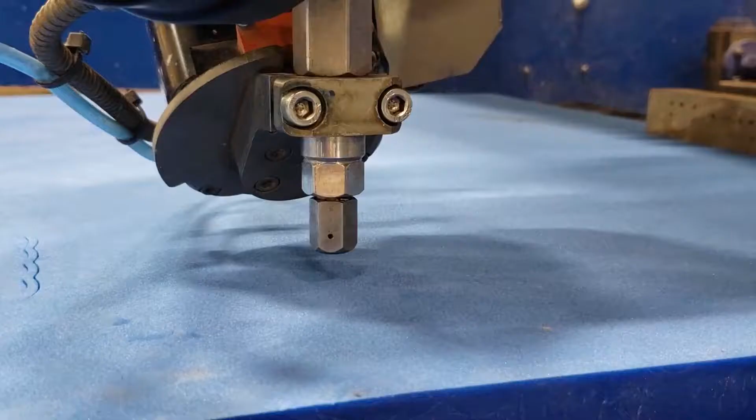What you can see here is we've got some of the Zotefoams blue azote material, and we're cutting this on our in-house Apex 60 mechanism. This is a mechanism that can be outfitted on any of our water-only systems to really increase the production capabilities of your WaterJet.

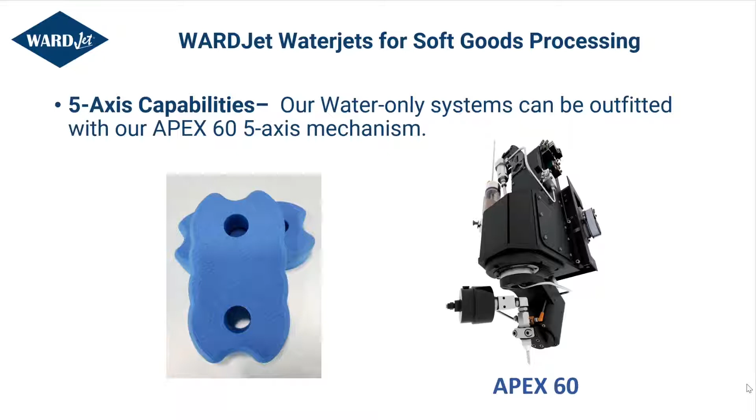As you can see, it's able to cut both 2D shapes and then quickly transition to cut that 45-degree bevel on the outside of that piece, and then back to 2D to cut the final profile. The finished piece is something that would be very hard to manufacture just as quickly if you weren't using the WaterJet.

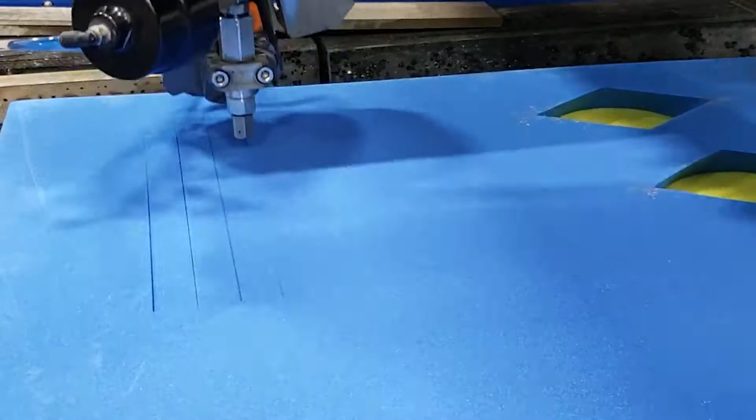The other piece I want to talk about is material stacking and common line cutting. We touched on these last week, but on the same mechanism running there, you'll see the Apex 60 running only in 2D mode here, trying to process multiple cubes, taking its passes back and forth and then transitioning again.

What this is doing is we've got two materials stacked, both the blue and the yellow, and we're also using common line cutting. Instead of taking 4 passes for each one of those for that cube, we're just taking 2 swipes at it and then using common line cutting.

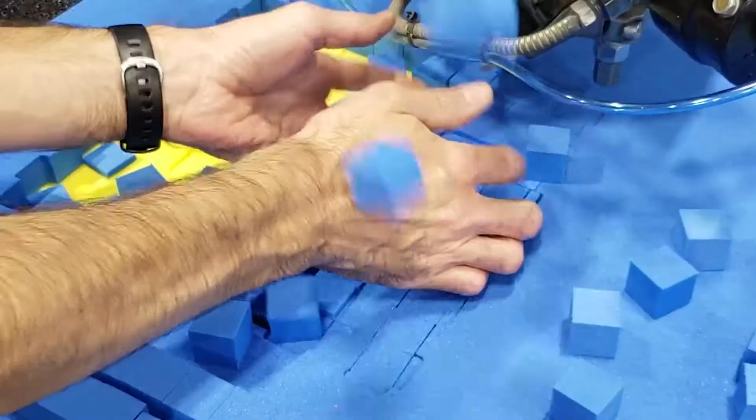As you can see, as Jeff starts to unload some of those pieces, you end up with a lot of production very quickly, compared to if we were to try to do this on a single sheet and cut out each one of those cubes individually. Clearly this is a simple shape, but the basic principles translate over into whatever piece it is you may be cutting.

The last issue I want to talk about this week is some of the different workflows that you can get for water-only cutting, and clearly WARDJet offers a variety and is able to cover any need. I wanted to start off first with our J series and L series, which is really a pass-through workflow, which we saw last week in the machine that we walked through.

You'll see that we start with raw material on one end of the machine. It gets passed through, processed in the middle, and then out come your finished parts. What you get with this is very, very high throughput because you're able to load material, process material, and unload material all at the same time.

Typically you'd find this in a facility where you've got multiple people running this machine, one person responsible for loading the material and starting the program, while another is dedicated to just unloading the material. With systems like this, it's not uncommon to see one warehouse space with raw material on one side, 2 or 3 employees running just a single machine, and then finished parts getting packaged and sent out to customers.

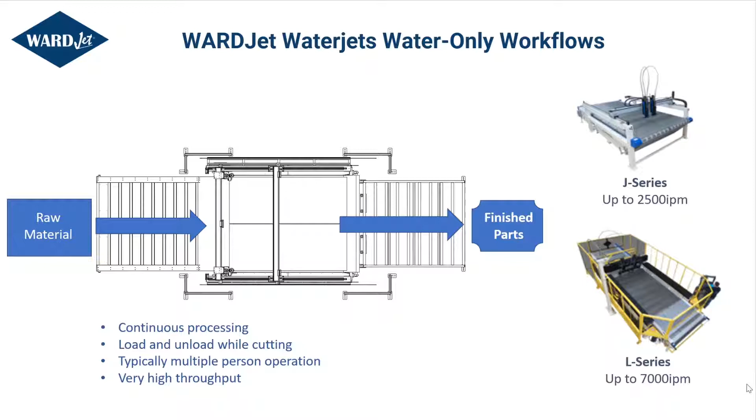One of the more typical workflows you'll see is just your standard WaterJet workflow. With this one, you've got a single plank of raw material that gets loaded onto the machine, it gets processed, and then it gets unloaded. Now clearly this is not going to be the high throughput that you get on some of the other systems, but this does have its place in many facilities.

Those facilities may have limited space, so this is going to offer the smallest footprint in your shop. This can also be very easily run by a single person, most often someone who's programming the parts, loading the parts, running the machine, and then unloading those as well.

There are ways to increase throughput on this. Multiple heads can clearly increase the volume that you can output with this workflow, but most often you'll see in machine setups like this, you may have 2, 3, 4, up to 10 machines in a facility, all dedicated to either one application or one material, all being dedicated to one operator, or potentially there's one operator that's running 2 machines at the same time.

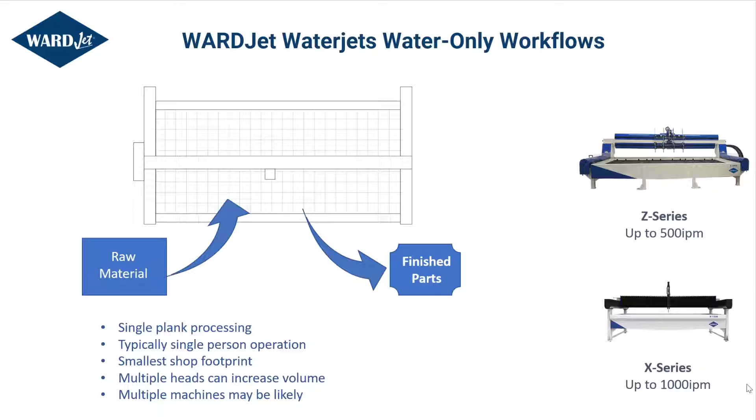And you'll see this kind of workflow in our Z series and in our X series machines.

The final workflow I want to talk to you about is one we're going to be looking at today with Jeff and Johnny on our floor. Now this is one of our X series machines that takes that typical footprint, but also adds a shuttle table to this. So the one we're going to see today is an over-under shuttle table. We also do have pass-through shuttle tables as well, which kind of give you a little mix between the J and an X on there.

So this is really semi-continuous processing, where you're still taking a piece of raw material and putting it up on the bed, loading it in, and you're operating one at a time. But the benefit of this is you're still able to load and unload one sheet while the other is processing. So typically while one is processing, you're taking the spent parts and the skeleton from the previous operation, loading a new sheet on, and then as that first process ends, you're swapping those tables in and out.

Again, you get the benefit of the smaller footprint in here, not quite as small as a typical one, but not quite as expansive as you'll need for a J series or an L series. The same tenets apply - multiple heads are going to increase your volume in there. So there really is kind of a mix when you talk about this.

So, looking over the different workflows that we have, it's very evident that WARDJet has dedicated a lot of time, energy, and engineering into covering whatever your application may be. So please feel free, contact us, talk to your sales rep. We're very happy to take your material and your application into consideration, as well as your warehouse and your business needs, to provide you with the best waterjet system on the market.

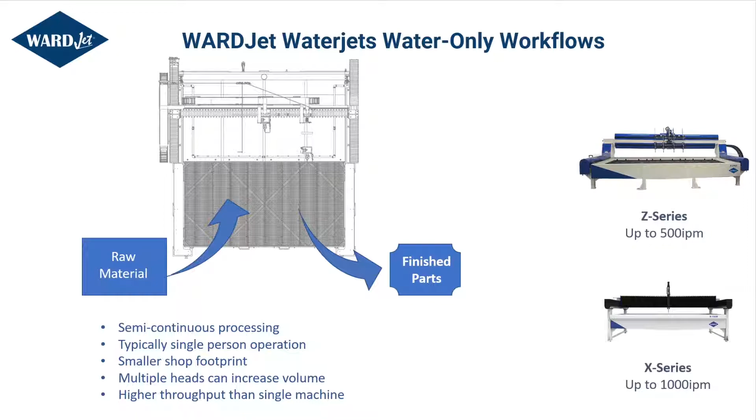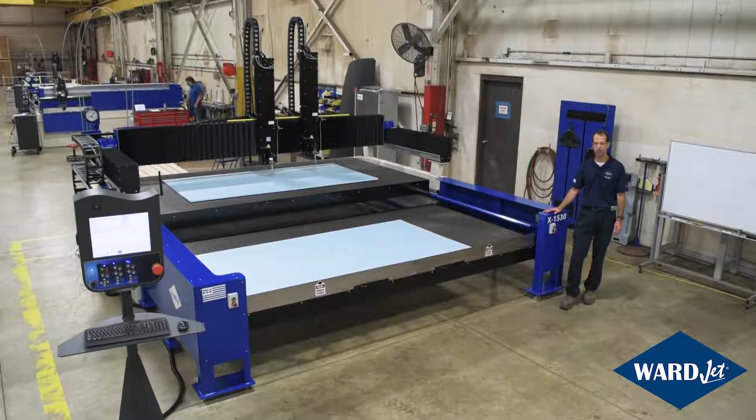Whether a company opts for a system like our Z series with the conveyor and the long loading and unloading areas, or a series like this with the shuttle tables, depends on a few different factors. First of all, how the material's flowing through their facility. So if you've got an aisle here and this is up against a wall, you can have area here where you've got your raw material, your cut material, and this is very conducive to having one person run this machine, load and unload your material.

Z series, where they're a little bit longer, that's often you'll have multiple people running it, one person at one end putting maybe material on, other person at the other end of the table taking the material off.

One of the important factors when looking at a waterjet system is your choice of substrate that you're going to be cutting on top of. So depending on the density of your material, the application, size orifice, pressure, things like that, will determine whether you use something like this Johnson screen or a material like a water brick.

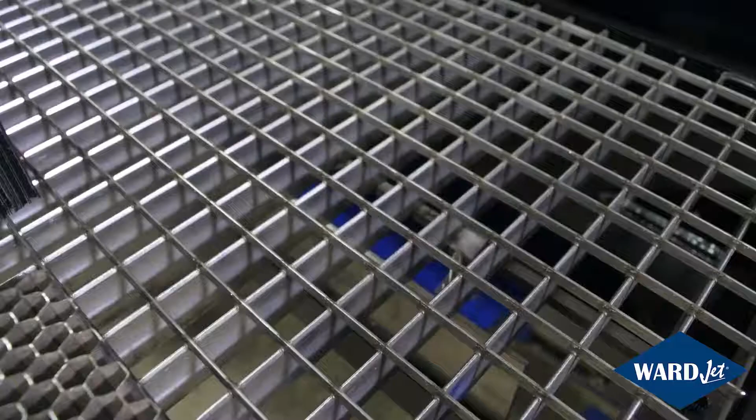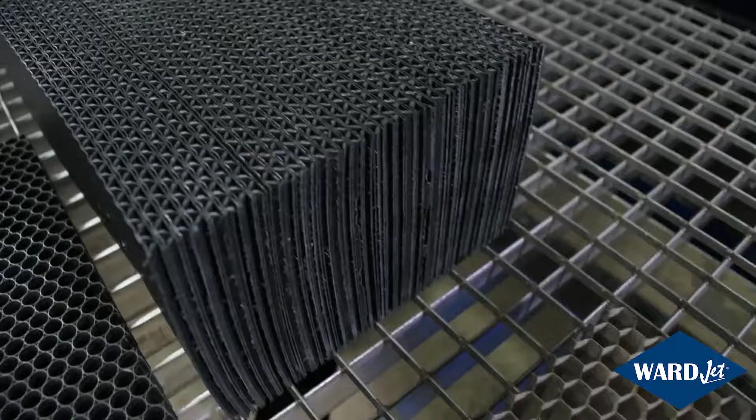So if your part's going into a crate and the back surface isn't going to be visible, you might choose something like the Johnson screen, or maybe a honeycomb, which can come in different opening sizes and widths of the webs there. If the part's going to be more visible and you don't want to see any sort of dings on the back of it, then you might choose something like this water brick here. And depending on the color of the material you're cutting, the water brick can be either white or black.

So it's one of those important factors where we can do some test cuts on these different materials, and then you can choose which one's optimum for your situation.

So here we have the Z carriages on this machine. This customer has opted for 2 cutting heads. Depending on the size of the parts you're cutting, you might decide for 3, 4, 5, or 6 cutting heads. You can also get spreader bars with multiple cutting heads on there.

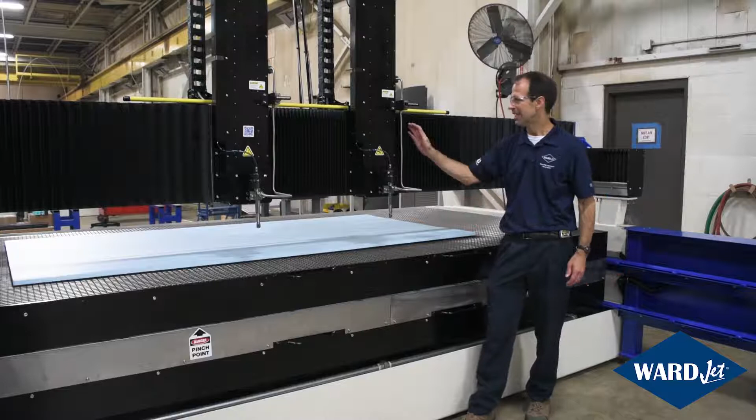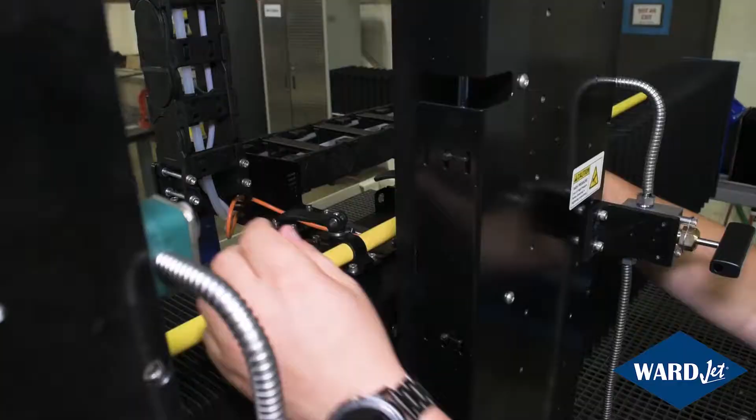For the head spacing on this machine, this is manual head spacing, so there's a couple cam levers back here. The operator can very easily loosen those levers and position the cutting head to the desired distance, then lock those back down. You can also opt for programmable head spacing.

Depending on the size of the parts in the program, the CNC file can automatically change that head spacing, and can even change that head spacing throughout the program.

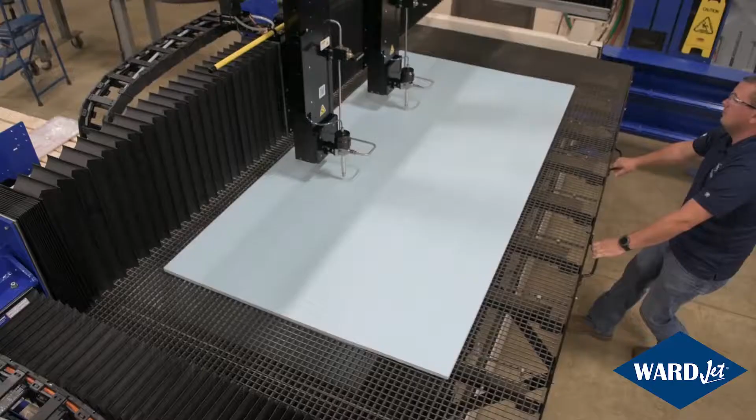This machine's got programmable Z. As you can note, we have 24 inches of Z-axis travel here. That allows us to get down to that lower table. So automatically when we switch tables, we're going to switch our limits, and then the cutting heads are going to go down to the appropriate height off of the material on the lower table.

A couple other features to note here. We've got hand valves, so operators doing any maintenance on the cutting head can close the hand valve to isolate pressure to the cutting heads.

One other thing to note here, on this Z carriage, we have this QR code. We put these around our machines at various strategic locations, and this will link to things like videos and manuals, any sort of documentation that might help with maintenance on that particular aspect of the machine.

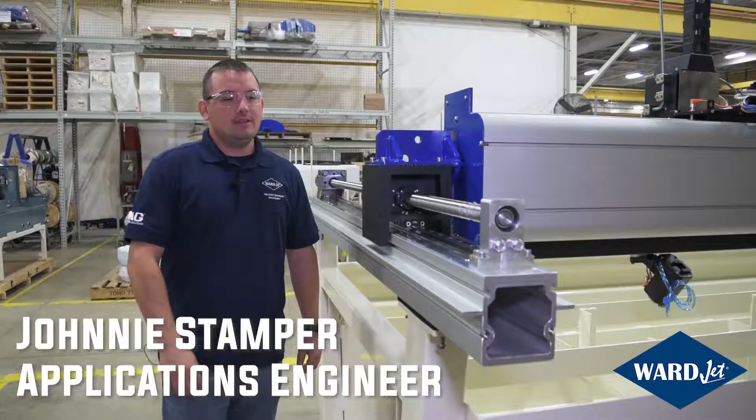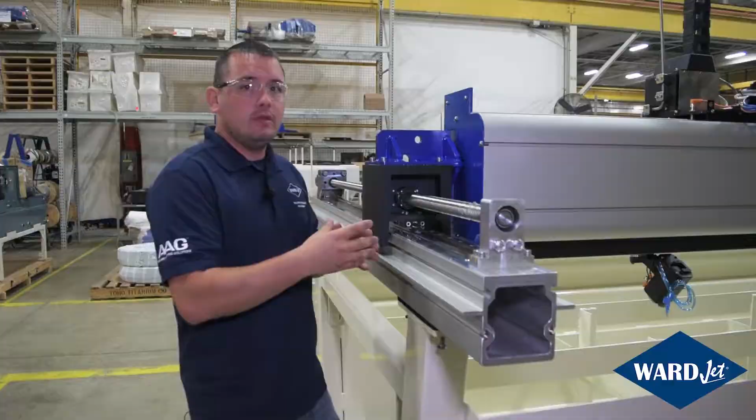Our X Series line of machines have custom aluminum extruded side rails and cross beams, and we pair those with a THK ball screw and linear rail. The ball screw has 2 raceways on it, and we use one of them. So in 10 years, if you see tolerances start to expand or get a little bit of play, you can switch that to the next race, and it gives you almost a brand new machine.

With the THK ball screws, linear rails, and the aluminum extruded side rails and cross beam, we pair that with a large motor and gearbox combination, and that gives us the ability to hit speeds up to 1,000 inches a minute and acceleration rates up to 15 inches per second squared.

Okay, we'll go ahead and run through the basic workflow on this machine. We've already got material loaded on the top table, so Johnnie can press the release button and push this table in. Obviously this machine is a manual system, but these tables can also be powered, so that once these tables are locked into position, he can then run the program.

Controller has a couple things going on here. We've got head leveling, so head 2 is always going to come down to the same height as head 1, and then we're working off of a work offset position, which establishes our height off of the material. Depending on whether we're using the top or bottom table, we can have different Z heights there.

So once the program finishes, then again we'll be able to release the tables, swap them out, and continue on with the process. So that program's done, we release.

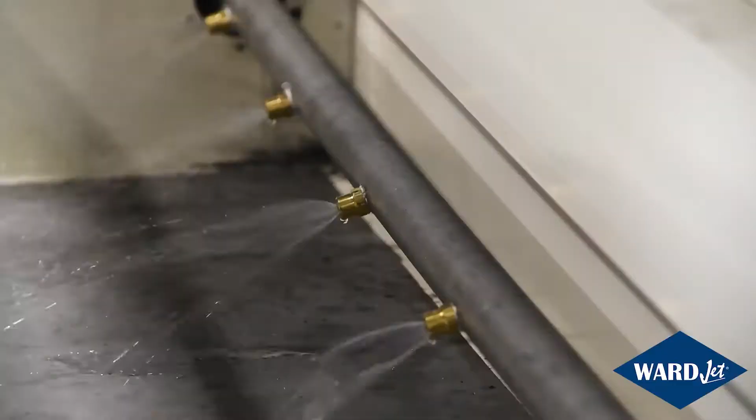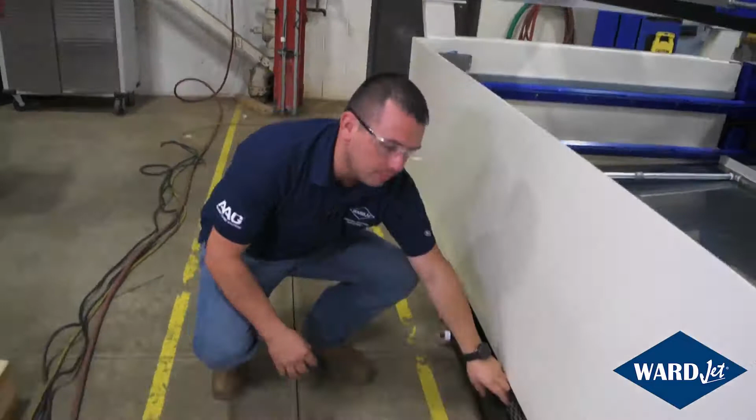It has a built-in washdown system that pushes that kerf material to the back of the tank and down that drain point. As the water exits the tank, it goes into a sump pump tray. The sump pump tray has a stainless steel grate to catch any large media.

As the water comes through, it fills the tank. The tank then has an electronic sensor here that activates a timer, that activates a pump to pump the water down and out of the tank. That water can go to a paper bed filter, to a drain, or anything the customer is looking to do with it.

Hello, my name is Terry Craig, and I've been asked to speak with you about a family of materials that is produced by a unique process. Zotefoams offers a range of high-performance, lightweight, cross-linked polyolefin block foams known as Azote that are among the purest, most consistent, and technically advanced cellular materials on the market.

But first, a bit about my credentials. I've been in the foam fabrication industry for over 35 years with direct experience in automotive, aerospace, mass transit, medical, defense, electronics, and of course, product protection. My career has spanned operational and executive roles in quality assurance, manufacturing, product engineering, design, and business development.

I've worked with Zotefoams materials since the early 90s, and today I want to share some of the advantages of their products from a fabricator's perspective and how these advantages can help you to grow your business. It all starts with an understanding of Zotefoam's unique process.

Most cross-linked polyethylene and copolymer block foams rely on chemical blowing agents to create a cellular matrix, and those blowing agents can introduce volatile organic compounds, which become latent and residual in the foam material. Zotefoam's Azote materials do not use chemical blowing agents. Instead, they use high purity nitrogen, which is among the most common elements in the universe and is generally considered inert. In fact, it makes up approximately 78% of the air we breathe.

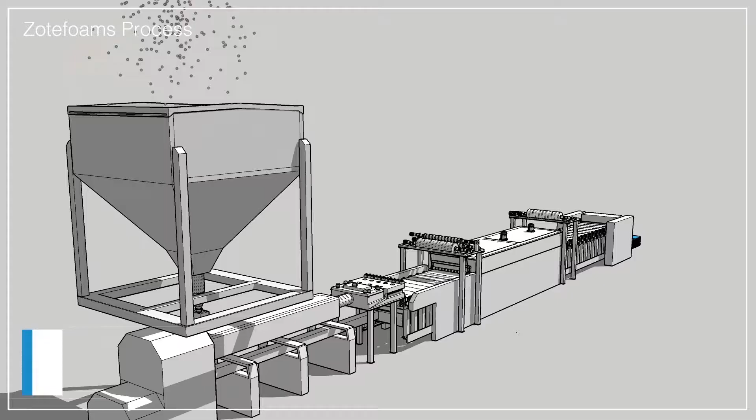So how does Zotefoams produce foam from nitrogen? Well, it involves a unique three-stage process. Stage 1 is extrusion and cross-linking, where polymer and additives such as colorants, fire retardants, or conductive agents are extruded into a solid, continuous plate, which is cross-linked, cooled, then cut into slabs.

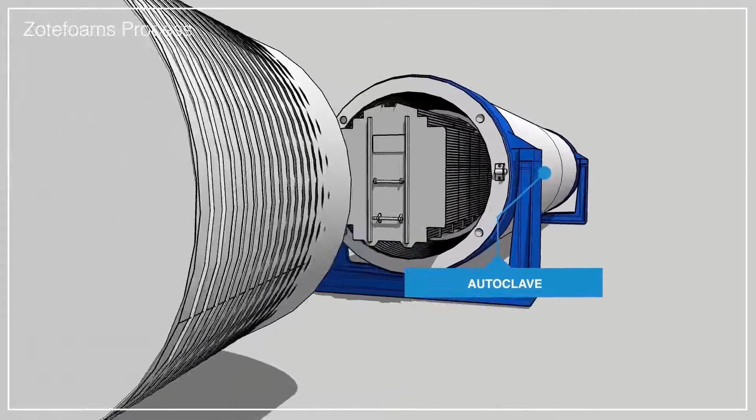Stage 2 is nitrogen saturation, and this is where the science begins. Slabs are heated above melting point and infused with high-pressure nitrogen gas. Rapid depressurization at a controlled rate causes nucleation of the cellular structure within the slab, and subsequent cooling while under pressure locks in the nitrogen.

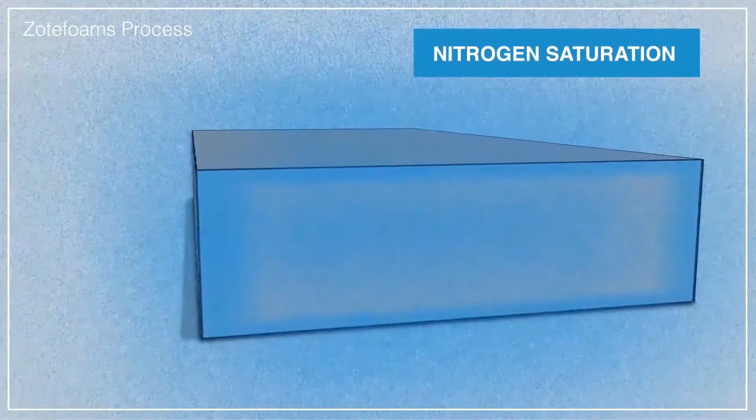Temperatures in the autoclave reach above 250°C or 480°F, and pressure can exceed 670 bar or 10,000 psi. To put that in perspective, that's the pressure of water more than 4 miles beneath the surface of the ocean.

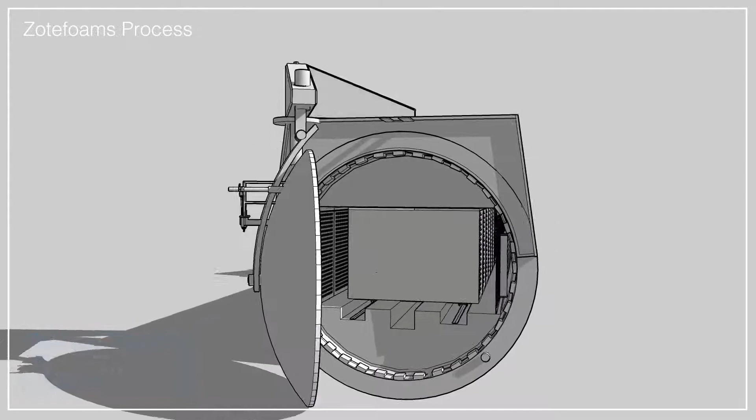Stage 3 is expansion. By heating the slabs under moderate pressure and then reducing the pressure, the locked-in nitrogen is allowed to expand. Important to note is in this process, expansion is unconstrained and uniform in each direction. There's no physical mold or platen that can cause densification along sidewalls or from top to bottom within the block. This is a very important distinction which contributes to several performance characteristics which I will describe in detail.

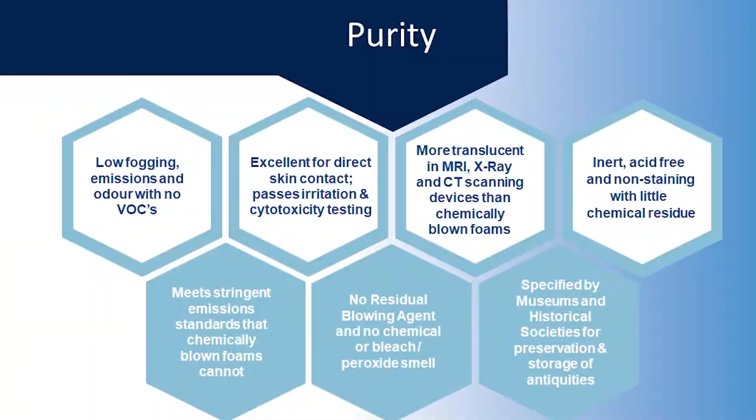How does this unique process benefit the use of the material, and specifically its fabrication? First, from its purity: low outgassing, low VOCs, no residual blowing agent, and low fogging means you have the ability to provide protection of devices and instrumentation that contains sensitive optics, lenses, and electronic circuits without concern for fogging or staining. Coupled with very little odor makes these materials perfect for sealed bag and case products such as supplied in medical kitting, product protection, and case inserts.

It also enables you to meet stringent interior emissions requirements for human occupancy applications such as in automotive, aviation, and mass transit. It is also excellent for direct skin contact in medical and sports products, meeting international standards for skin irritation, sensitivity, and cytotoxicity, and its closed cell structure prevents moisture and fluid ingress while suppressing bacterial growth.

Purity also produces foams with the whitest whites, the deepest blacks, and vibrant colors, all providing unparalleled choice to suit the end-use product.

Consistency. The Zotefoams process enables control of the cell size. Combined with unconstrained expansion, the cell structure is considered isotropic, meaning predictable performance no matter what direction a stress or strain force is applied from.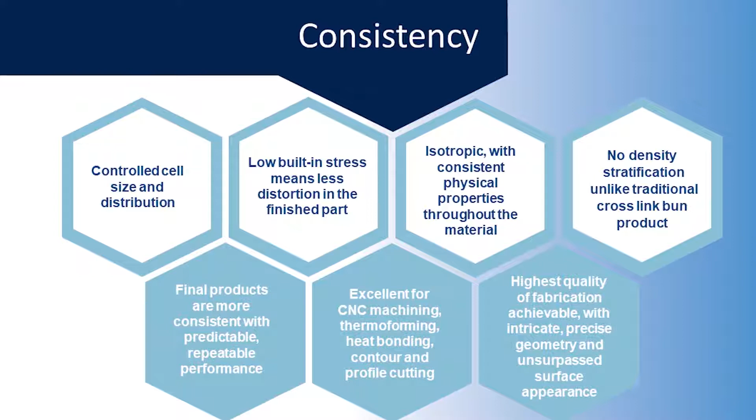There's no machine direction cellular orientation, no elongated cell structure, and no density stratification through the block. From top to bottom, across the full width and length, the material will process and behave the same. For applications involving comfort or protection, this means product performance will be uniform, consistent, and predictable no matter the orientation that the material is used in.

Unconstrained expansion also means low built-in stress, which reduces the potential for distortion during processing and in the final product. Have you ever split a bun into sheets and then discovered that the overall dimensions change or the squareness of the sheet becomes distorted? Zotefoams materials are dimensionally stable as received.

Important to throughput, it does not need to be split into sheets, then stored anywhere from 24 to 72 hours or more to allow the material to relax and normalize. And unlike chemically blown materials, Zotefoams products do not need to be pre-split to allow outgas of any residual blowing agent.

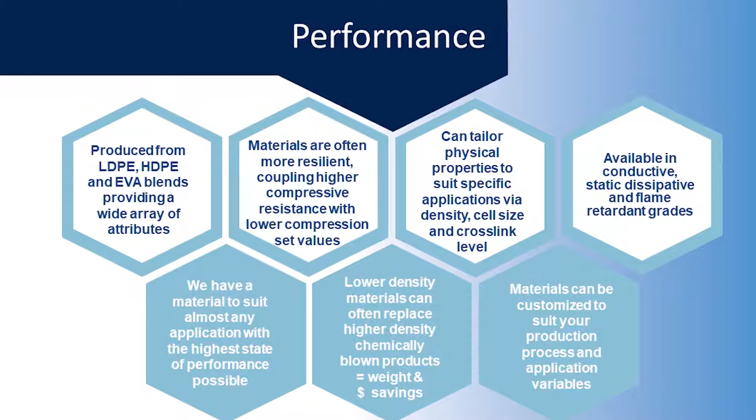Now let's talk about performance in processing. Uniformity and controlled cell size produces consistent, finished product with clean, smooth edges and with surfaces that are more resistant to marring and scuffing than most chemically blown materials. This is often important in case inserts, display packaging, medical, and sports components.

You can achieve high quality, intricate, and precise geometry with unsurpassed surface appearance, be it through CNC machining, waterjet cutting, die cutting, hot wire or abrasive wire profiling, or virtually any manner of fabrication technique.

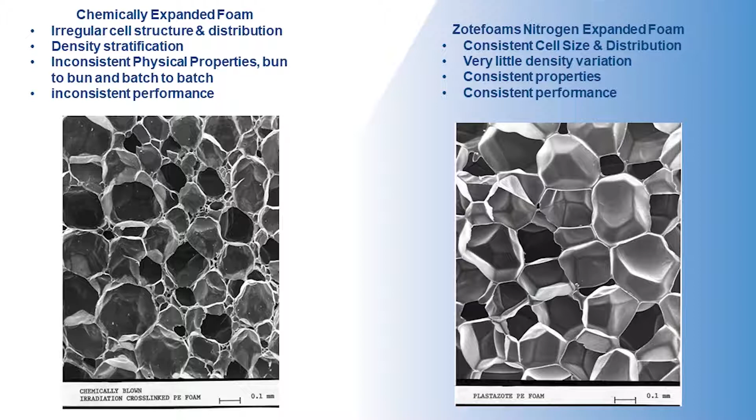Zotefoams materials are also easily thermoformed, heat laminated and bonded, with throughput speeds and yield factors that are among the best in the industry. Often, lower density materials can outperform higher density competitive product while providing savings in weight and in overall component cost.

We've talked about the material, now let's talk about Zotefoams, the company. They offer the widest range of block materials on the market, including low density and high density cross-linked polyethylenes, VAs and EVAs, along with fire retardant, conductive, static dissipative versions, and specialty polymers including nylon, PVDF, and TPE.

Zotefoams has the ability to tailor the dimensions of their products to achieve optimum dimensional yields on high volume applications. This reduces material content, increases production throughput, and importantly, reduces waste.

Supported by decades of technical experience and documentation geared specifically for regulated industries, including automotive, medical, defense, and transportation, Zotefoams acts as an extension of your sales and technical departments.

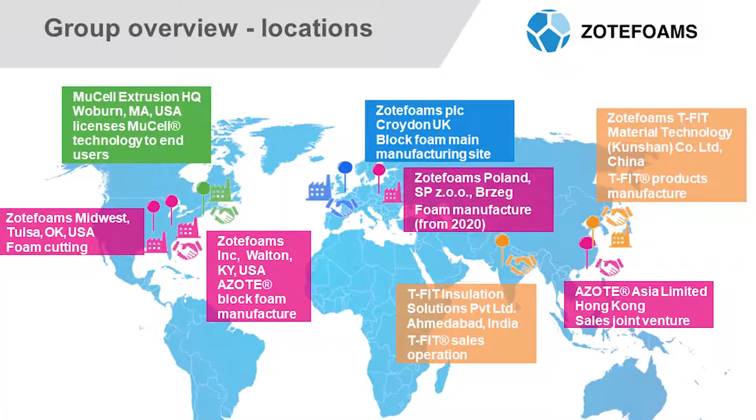Being onshore produced with a controlled distribution network, the logistics benefits include LTL shipments, no upfront costs associated with placement of offshore container load orders, reduced inventory, and importantly, increased turns, putting cash flow back in your wallet.

To summarize, unique process produces unique materials: pure, lightweight, consistent, and visually appealing materials that process with ease and speed, and in combination with product range, technical support, and onshore logistics, enables fabricators to grow their business in virtually every major market and application.

To learn more about the extensive benefits of specifying and processing Zotefoams products, please connect with us through zotefoams.com. We will be very pleased to answer any questions you may have. Thank you for your time today.

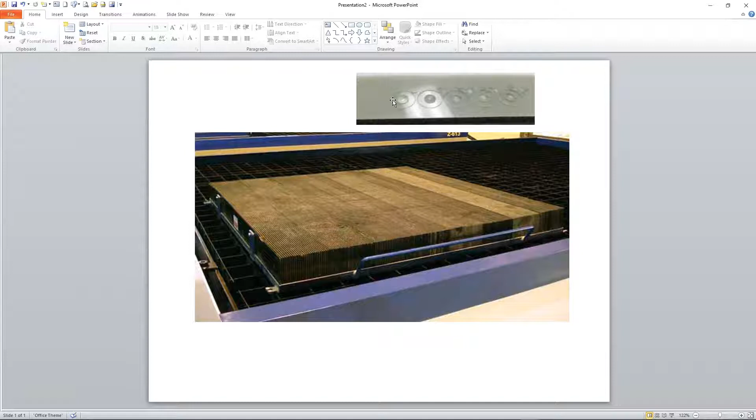For example, if somebody's cutting very small parts, they probably don't want to cut something like this on the chain system because the parts will end up falling through the chain, unless you tab them in, and then you've got to break them all out. So something like this, you'd probably want to cut on a water brick table.

That doesn't mean you can't cut it on a system like a J Series with the chain, because you could take a tray that has the corrugated plastic water bricks in it, lay your material up on that, and use the chain conveyor as a shuttle table to move it into the cutting area. So if it's only periodically you're doing something like this, you could still go with a chain system and use the water brick for that.

Also, very light materials may flutter when cutting on top of the chain because of the back pressure. So again, you might want to use some water brick like this if you're doing that periodically. But if it's something you're doing frequently, you'd probably opt more toward the shuttle table system with the grates.

There was a question about making small metal parts - how do we make cavities in the foam for shipment? Usually people will do several layers, so you have a base layer that might be thinner, more rigid foam or plastic. There are software packages out there - we have one through iGEMS where you can take in your shape profile and create a silhouette of that shape, then cut it out of the foam.

Some people will have a light box with translucent plastic, and they'll lay their parts or tools on it. You see this a lot in the aviation industry when people are doing engine repair and have to keep track of all the tools. They'll lay out all the parts and tools on the light box, take a picture of it, and then bring that into software to create the cutout. That's quite a popular technique for water-only cutting.

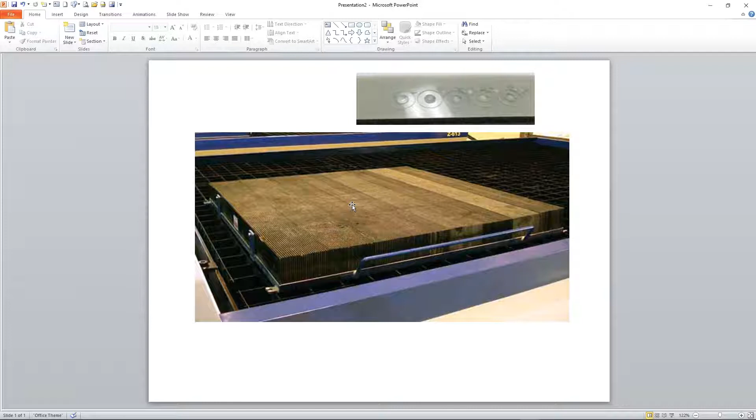There was also a question about why you'd choose an over-under versus a front-to-back shuttle table system. In the video, we saw the over-under shuttle table. As Benji mentioned, we also do a front-to-back shuttle table system.

A couple factors come into play there. Number one is the amount of room available. Also, if your material can't get wet - say you're doing an open cell foam - with the over-under table you might get water dripping from the top table onto the bottom table. So that's one thing to consider when choosing front-to-back versus over-under.

If you're doing a steady diet of very thick material, you might opt for the front-to-back. On the machine we saw in the video, the bottom table can handle material up to 4 inches thick, and the top table up to about 6 inches thick. So if you're doing a lot of material 6 inches and thicker, you might opt for the front-to-back, where you could stack material up to almost 12 inches high. If it's only infrequent that you do material thicker than 4 inches, you could just do the thicker material on the top table and pay attention to that.

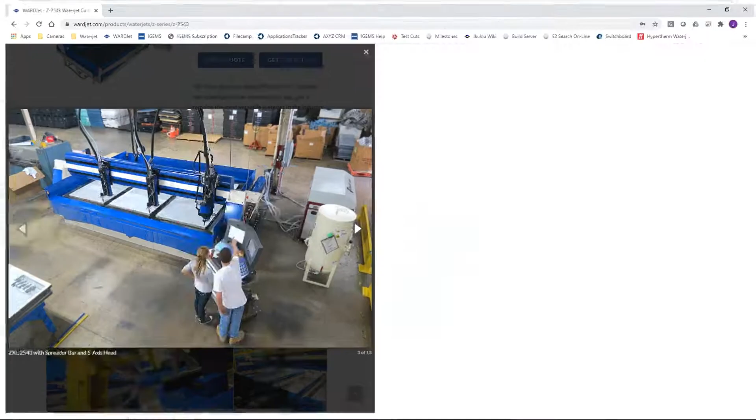Another reason to go front-to-back is putting multiple sheets with multiple heads - you could load 3 or 4 by 8 sheets and run them right through the whole system. The over-under tends to be one sheet, or several smaller sheets. You could have multiple heads, but it would just be smaller parts as opposed to full sheets.

This one doesn't have the shuttle table system on it, but we have done many systems like this with the shuttle table system going front to back - sliding the table in with 3 sheets, cutting the 3 sheets, and then moving out the back and forth. Very productive systems.

Do different densities of foams cut differently? Yes, absolutely. Your 2 pound, 4 pound foams, you can cut those at virtually as fast as the machine can go. As you start getting up into your 6, 8 pound foams, you've got to slow down. It also depends on the thickness of material. If you're doing 4 inches thick of 8 pound foam, you might be cutting at 25 inches a minute versus 1 inch thick 2 pound foam, where you can go 2,000 inches a minute.

And then you have to balance that with the size of your pump and the size of the orifice. So all those things we can test out if you're interested. Typically people send us a stack of material, different densities and thicknesses, and we'll slice across it with different orifices, pressures, and speeds, and send them back to the customer. Based on their application, they can determine what's best for them.

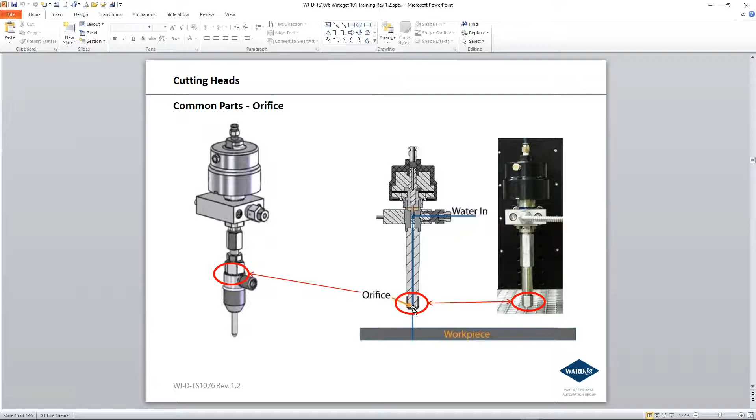For those of you that aren't currently doing water jet cutting, the orifice is the thing in the cutting head that converts your high pressure stream up here to a stream moving at 2,000 to 3,000 miles per hour down here. The size of the hole in this orifice can be anywhere from 4 thousandths of an inch up to 14 thousandths of an inch, depending on the application, the number of heads, and the size of the pump. Those orifices can be made out of different materials: rubies, sapphire, or diamond.

The rubies and sapphires have relatively short life for somebody doing water-only cutting. If you had a system with 4 cutting heads running sapphires, and each is failing at a random range between 0 and 80 hours, you're constantly chasing your tail changing out the sapphire orifice. Whereas the diamond orifice is a bit more upfront in cost, but on an hourly basis ends up being cheaper, and you can just put them in and not worry about them for several months at a time. It also reduces your downtime for maintenance. So definitely would recommend diamonds for water-only applications.

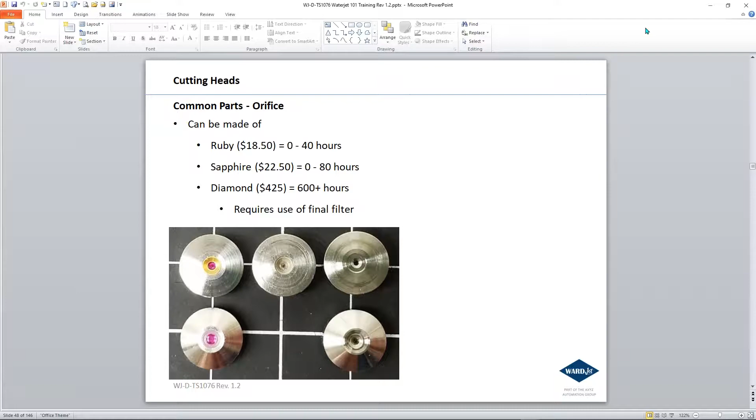There's a question about cutting angles or chamfers on parts. That's a big part of the water-only industry now, seen that coming on a lot in the past few years. With our 5-axis heads, you can put angles on there. A lot of people doing returnable dunnage will put maybe just a slight 5 or 10 degree angle on the outside of the foam so it can slide into the crate easily. In the video we showed earlier, it was putting a 45-degree bevel around the top of the part. So it's certainly a growing aspect of water-only cutting.

One key factor when it comes to the results is flatness of the material. If your material is wavy like a potato chip, you're not going to get as repeatable a result as if it's nice flat material like the Zotefoams material.

Question about what are some of the more interesting things you've cut water only. Obviously we've talked a lot about foam and things, but over the past almost 12 years I've been here, a couple applications come to mind.

We had one person interested in using water only for basically a butcher house, to chop up cows. That was kind of interesting because we had to go down to a local grocery store, buy a chunk of meat, put it on the table and slice across it. But that project went nowhere.